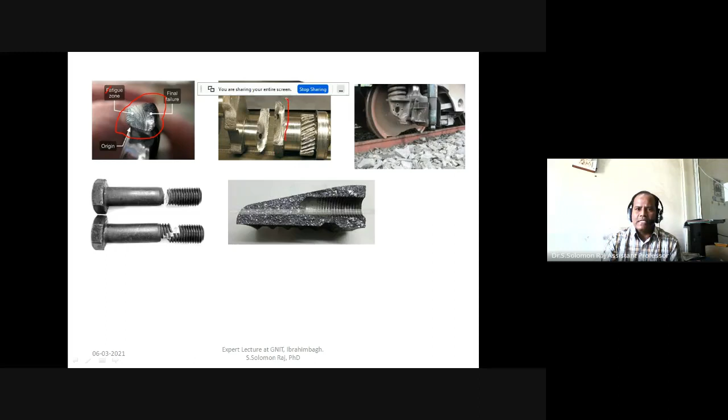Here if you see the gear tooth, once it is connected to some component, it has broken. And this is a railway wagon wheel—imagine, see, this is how it is broken. And this is the very famous component which we all know, it is a bolt. So this bolt has broken at these positions, and this is one such component.

Now tomorrow we all need to answer these questions and give solutions to them, and we need to come up with designs that do not cause failure. So the first statement you all should keep in mind is, as a design engineer, I should see that the component will not fail.

So we have said I don't want the component to fail because I want to arrest failure. Now comes the next question: what actually do I mean by a failure? That is very, very, very important.

Having said that, failure has got its own definitions. With regard to the shirts we wear, we wear a shirt for a few days, after that we try to throw it off. We know what is the failure with regard to the shirt: once it gets faded, or once the collar gets torn off, or once the button starts moving off, or once a tear comes, we do regard that to be a failure.

But when it comes to mechanical components, what do we mean by failure and how do we justify it? With regard to that, failure is basically associated with three factors in mechanical engineering. The first factor could be because of fracture—this is fracture that may lead to failure.

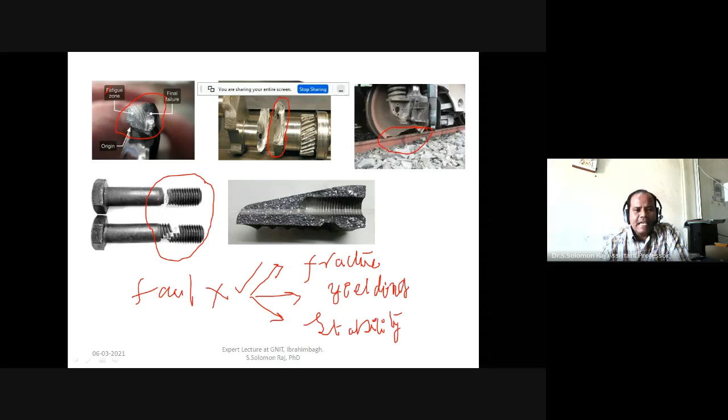For example, if you see here, the bolt we have seen has become two pieces. This means a clean fracture has happened—here the fracture has happened, here the fracture surface has come, here also the fracture has happened, and here also the fracture.

So what is a fracture? Fracture itself is a very big term, but to make you understand, fracture is nothing but creating two new surfaces. When a component breaks into two pieces—you can take a pen and break it, or tear a paper, or break a biscuit into two pieces—you are going to generate new surfaces there. So fracture is associated with the breaking of a component into two or more pieces, wherein two new surfaces are going to form.

In future you will study subjects such as fracture mechanics, linear fracture mechanics and non-linear fracture mechanics—it's altogether a very big science. So fracture is associated with the breaking of a component into two or three pieces.

That is one. Secondly, let us talk about yielding failure. Why do we call it a yielding failure? Just a small example only for my dear second year budding engineers, to give you a glimpse—say for example, there is a roof in our houses.

We have a roof and there is a fan rod. We all use fans at home, and the fan rotates continuously with its blades whenever we switch it on. People here would be sleeping comfortably or walking around, and they get the air distributed so that, because of evaporative cooling, we feel cool. That is the working principle of the fan.

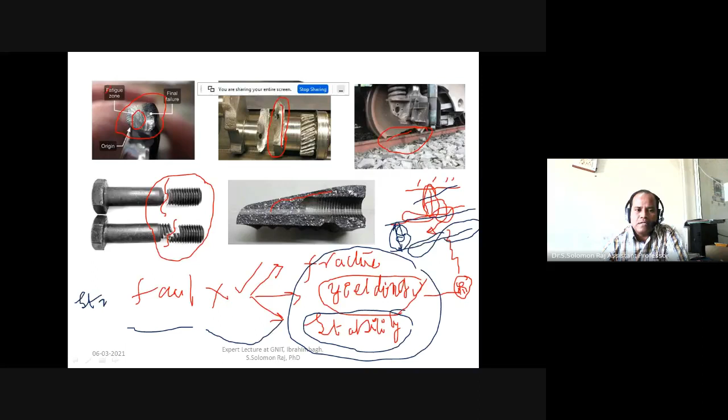All these failure modes—fracture, yielding, and instability—can be attributed to one powerful quantity in engineering, and that is what we call stress.

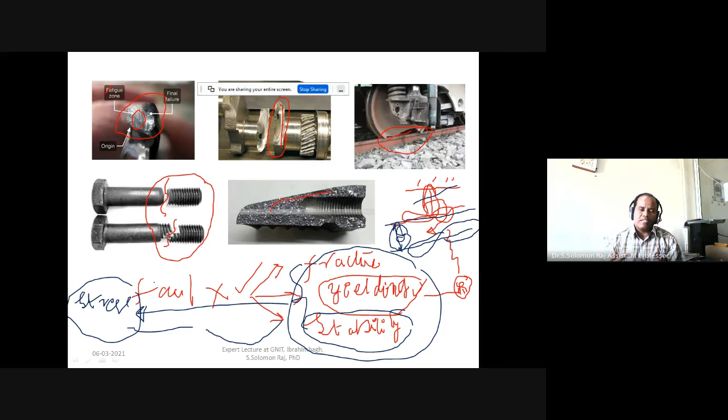Now I will try to throw some light on stress, because I'm specifically asked to answer questions on principal stresses and theories of failure, so I want to take you all in that direction. At any point, if you have anything to ask, please unmute yourself and keep asking. These three modes of failure are all attributed to stress.

Now comes the question: what is stress? For example, take this component. Why did it fail only here? Why did it not fail here, or here, or here—why only at this particular location has it failed?

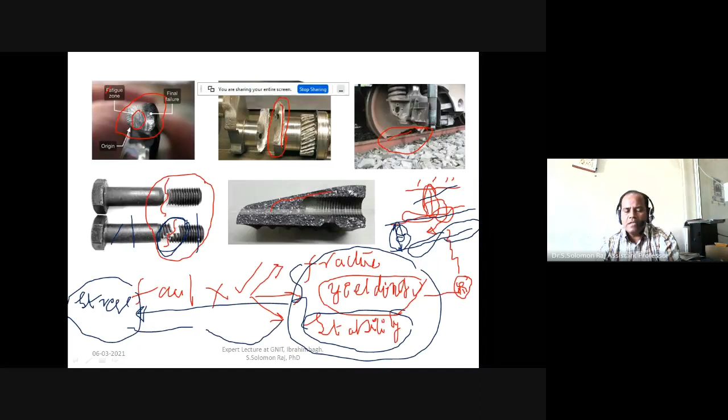Here comes the very important observation made by great scientists much before us. What they presented is—let me throw some light on what you can call stress.

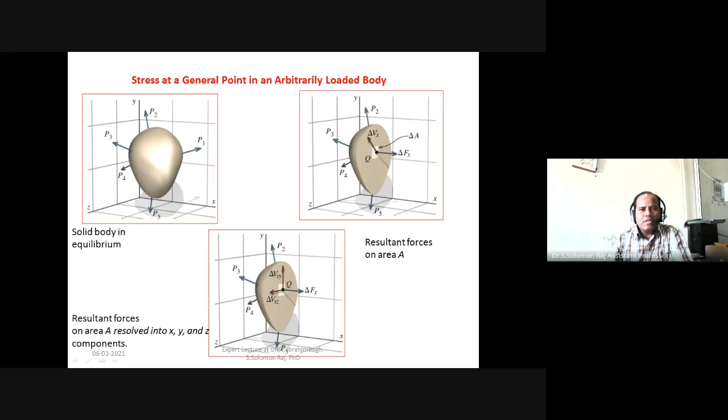Any component you or I design tomorrow—an aeroplane, ship, or household appliances, even a stove, motorcycle, shoes, or watch—is meant to carry some load. So it's very important for an engineer to understand what is actually happening at a point in a material. I want to connect this idea of stress to failure, then to principal stresses, then to theories of failure. Let us move step by step.

So let's say you have taken some material—it can be any random material. Plastic is a material, chalk piece is a material, wood is a material, iron is a material, aluminum is a material. We have a variety of materials.

Once you have a material, take some volume and make a component—a mobile, a bench, or a chair—where we are going to apply loads. If you observe any component, mostly we apply loads only on the surface of that particular component, and any loads we apply act only on the surface.

They act only on the surface. So upon the surface, I may apply point loads, sometimes distributed loads, sometimes varying loads—a variety of loads onto the surface.

Very good. We have applied the loads—what next? The target is, whatever loads I apply, I want this body or material to resist it. If it doesn't resist, it will just move as a rigid body, or flow very freely like a perfect plastic material, which would hamper the very purpose for which we designed it. So whenever we apply loads, this is a very important point: the material or component has infinite number of points.

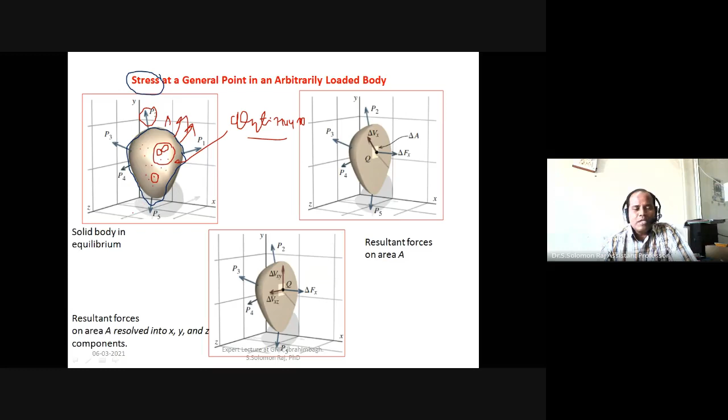Now another doubt might come to you: what is this area you're talking about? When I talk of an area, we should choose some area in the material to define the stress. So, taking this lump sum material, let us say I have cut it by taking some plane.

Imagine we have cut it. After cutting, it is going to look like this. This is the cut surface, the section surface. On this section surface, let us say it's a parallel surface.

Now I want to go to only one point, dear friends. This point is point Q. Having gone to one point in the material, what is happening at this particular point, how much stress is coming at that point, is the ultimate goal every design engineer is worried about, whether with ANSYS packages, fluid packages, or any mechanics. It basically begins with this.

So we need to go to this particular point, and because a point is dimensionless, there cannot be any area for a point. So what people started doing is surrounding this point, taking an infinitesimally small area, which I denote as delta A, a very, very small area.

Having taken this delta A as a plane, upon this plane there can act only two stresses: one stress perpendicular to the plane, and another stress parallel to the plane.

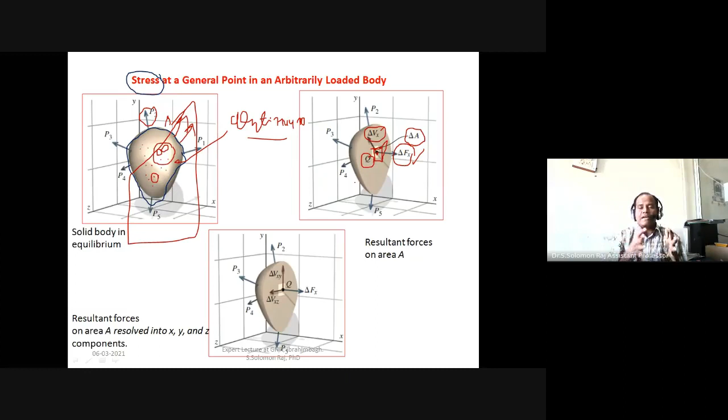So now, over this small infinitesimal area, I know the force acting perpendicular to it, and I know the force acting parallel to the plane. Having known them, people have defined stress as the resistive force offered by the material per unit cross-sectional area.

Now look into this third figure. This is the fundamental. If you understand these fundamentals, I am very sure the remaining big problems are very simple; anybody can solve them.

Let us come back to point Q, dear friends. This white area is the area I have taken, and over that small infinitesimal area, delta Fx is the load acting. This parallel shear force has infinite directions, but normal to the surface there is only one direction, because for a given plane the normal is fixed, while within the plane I can have infinite directions.

So in order to get rid of this, people thought of splitting this in-plane shear force into two components. Taking this as the x-axis and this as the y-axis, we split delta Vx into two components: delta Vxy acting along the y-axis, and delta Vxz acting along the z-axis. We split it because there are infinite directions for the shear force, and in order to be concise and get a unique solution, I need to split it into two directions.

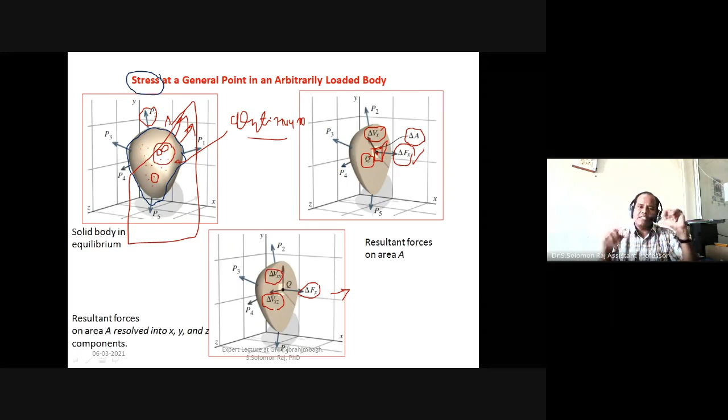So finally, you should have understood that at a given point on a given plane, there are going to be three force components: one along x, delta Fx; one along y, delta Vxy; and one along z, delta Vxz. Now I know the forces, and I know the area of this small infinitesimal portion I have taken.

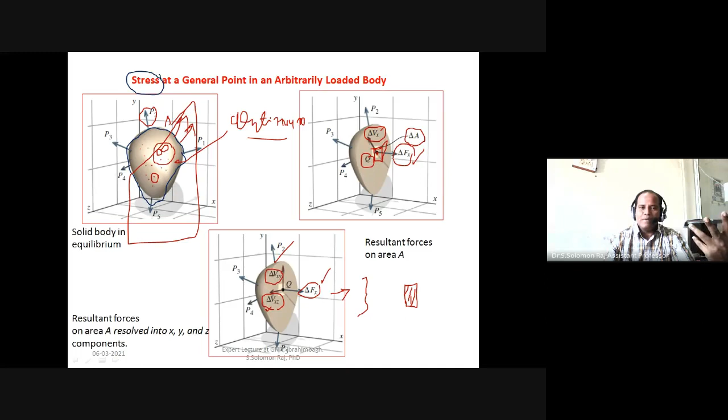I do call it as delta A. By definition, stress along x is normal stress, denoted with sigma. Normal stress along x is equal to the limit as delta A tends to 0. This term is very important: limit delta A tends to 0 means the area is getting converged to a point. So delta Fx, the force acting along x, divided by delta A will give us the normal stress acting along the x direction.

And what about the two other components? Those two are shear, because in-plane loads are called shear loads, and the corresponding stresses are shear stresses, denoted tau xy. Generally in any book they denote it with tau.

Tau xy means, dear people, we need to pay attention to the subscripts here. We have two subscripts, one is y and one is x. The y indicates the direction of the stress, very important. The second subscript index indicates the direction of the stress, and the first index indicates the normal to the plane. So tau xy means it is the shear stress acting in the y direction on a plane whose outward normal is in the x direction.

If you read a very good foreign author's book, they are very specific about the notation. But at your level, second year or third year, without knowing all that, we can still solve so many problems and keep getting very good marks, and that runs our life, so it's no issue for us.

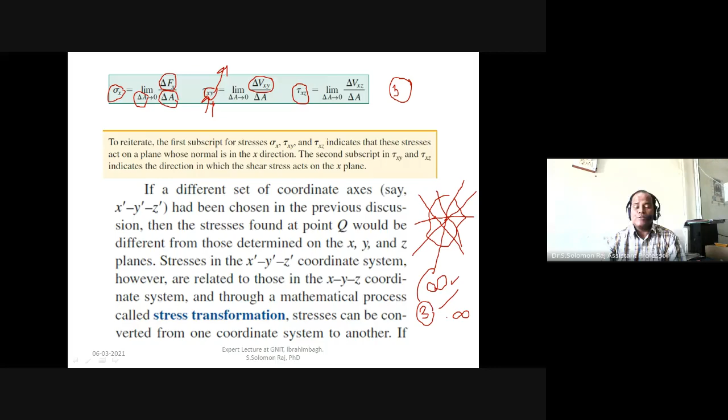Here actually what happened, the great people have come to our rescue.

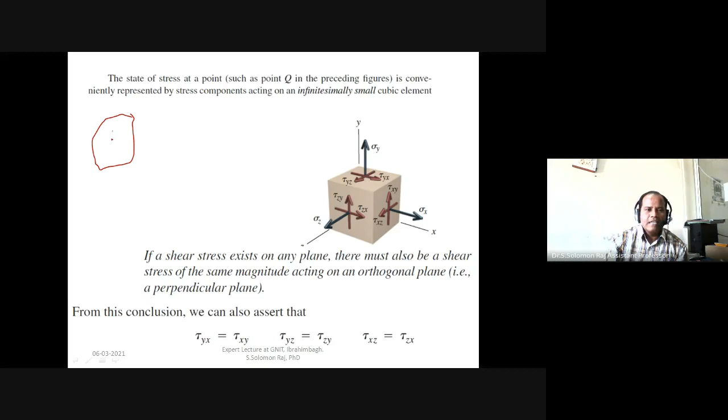These are mutually perpendicular to each other. So at this particular point, I need to draw three orthogonal planes. This investigation was brought in by Cauchy, a great gentleman who did a lot of research work regarding continuum mechanics, and came up with many equations we use when dealing with continuum mechanics. Through Cauchy, we learned there is no need to worry about infinite planes, but only about three mutually perpendicular planes.

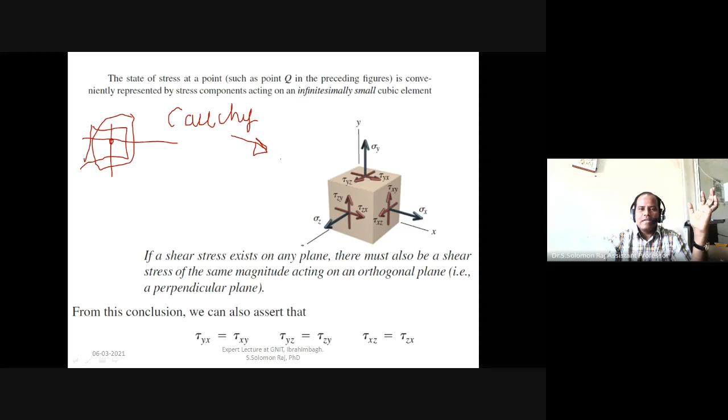In that aspect, there has come a great innovation, what we call a stress element. People have evolved a concept called the stress element. So what is a stress element at a point? At a point in a material, a stress element is nothing but an infinitesimal cube. At a point, we can all draw the cube - it is an infinitesimal small cube. Infinitesimal means everything tends to 0.

So in this cube, you know it is defined by 6 planes, but 3 of the planes are, let us say this is 1, this is 2, and this is 3, dear friends, and these 3 planes are orthogonal to each other. So if I want to know the state of stress at a point, I need to worry only about these 3 mutually perpendicular planes.

As we have seen before, each plane is specified by 3 stress components. So 3 plus 3 plus 3. Finally, state of stress at a point is defined by 9 stress components. Very important conclusion. But if I write them, you all can understand, anyway they are shown here.

One is normal stress along x, sigma x. Normal stress along y, sigma y. Normal stress along z axis, sigma z. So 3 normal stresses and 6 shear stresses, because each plane is characterized by 2 shear components.

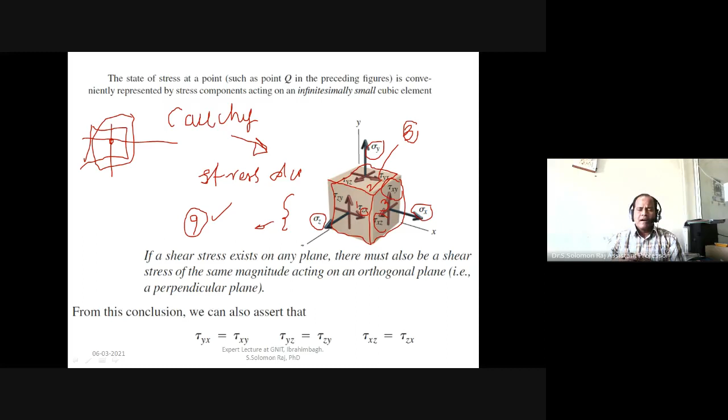Very important. So now, out of these 9 components, using Cauchy's theory and moment equilibrium, because everything finally has to be in equilibrium, out of all these 9 stress components, things have to be in equilibrium. The derivation takes a lot of time, so I'm not getting into that.

We can easily prove that out of these 6 shear components, only 3 shear components are independent, because shear stresses are complementary in nature. This you can learn by heart, since you are just beginners, second year students. So remember that shear stresses at a point in a material are complementary in nature.

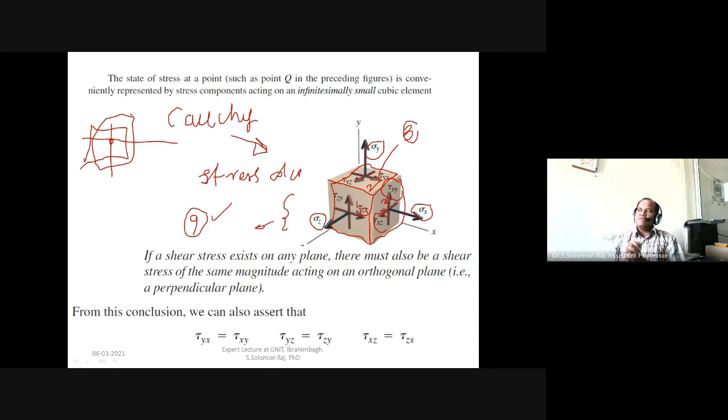So what does that mean? That means tau yx is equal to tau xy. So indices get exchanged: x place takes y, and y place takes x. Then these two are going to be equal.

That means if you take planes 1 or 2, and if you apply shear stress here, by default another will come free of cost. This is what is complementary. Complementary means without cost, like a complementary book or gift. People have proved through theories that shear stresses are complementary in nature. Because of this, out of 6 shear components, only 3 shear components are independent.

Finally, at a point in a material, the material can be homogeneous, non-homogeneous, anisotropic or isotropic, monoclinic, orthotropic - nothing to worry. But every point in a material can have 3 plus 3, that is 6 independent stress components. Though we have 9 components, because of the complementary nature of shear stresses, we only have 6 stress components at a point in the material. Very well said, dear friends.

Having said that, now let us move and try to connect ourselves to the failure of the components. As I told you, failure can be realized in terms of fracture, in terms of yielding, and in terms of stability. So these 3 terms are connected to the stresses.

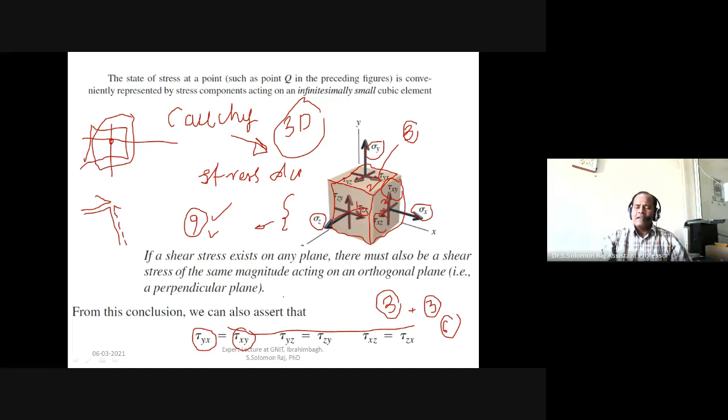Now, in a 3-dimensional scenario, because we were discussing just before, X, Y, Z axis - whenever you work in X, Y, Z axis, dear friends, you know it is nothing but a 3-dimensional space. So in a 3-dimensional space, we have 6 stress components. But working problems in 3D is very laborious and very complex under few circumstances.

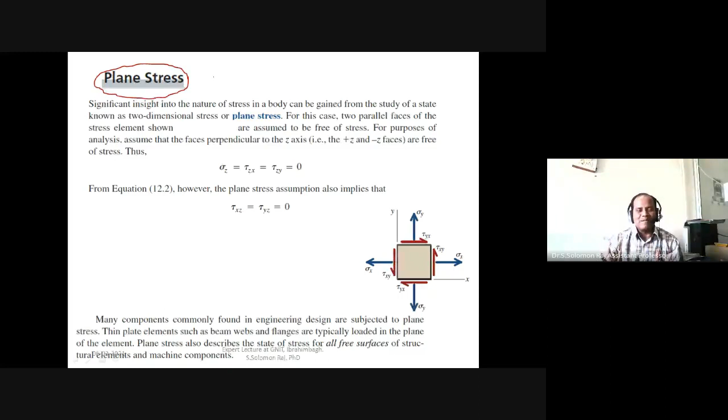So all the stresses, if I assume in the third direction are 0, that type of condition is what we call a plane stress condition.

Another powerful problem is plane strain. But mostly we do not discuss it in second, third and fourth year subjects, because plane stress is a bit easy when compared to plane strain.

So plane stress is one state of stress. For example, take a shaft. You have all studied torsion, say torsion of a shaft. It's a shaft, you have subjected it to twisting moment. Then at every point you take upon the surface, we are very sure only 2D stresses are going to act. The stress in the third direction we can make equal to 0, and therefore this problem can be modeled as a 2-dimensional problem. Even a cantilever beam, and many problems like this, we can study them in the 2-dimensional domain.

So in plane stress condition, all the stress components in the third direction will go to 0: Sigma Z, tau Zx, tau Zy, these will go to 0. This condition is called the plane stress condition.

So if I draw the plane stress condition with the same infinitesimal cube, and make these stress components 0, since 3 have gone to 0, I am left with only 3. What are they? One is sigma x, the sigma y, and the third component is tau xy.

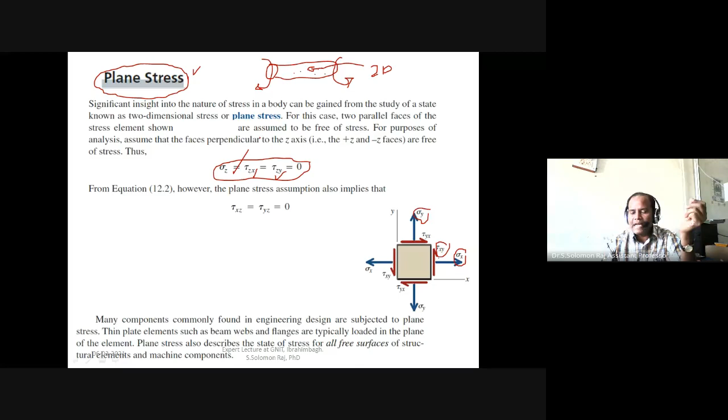And these two magnitudes are always the same because of complementary nature. If it is towards right, then it should be opposite; if it is like this, then it should be like this. Complementary means that they should come towards each other, or move away from each other, at a point in a material. So we are left with only 3 stress components.

So generally, instead of drawing the cube, people try to show it as a plane, but it doesn't mean it's a plane. It actually has some Z direction that is perpendicular to the presentation I am making.

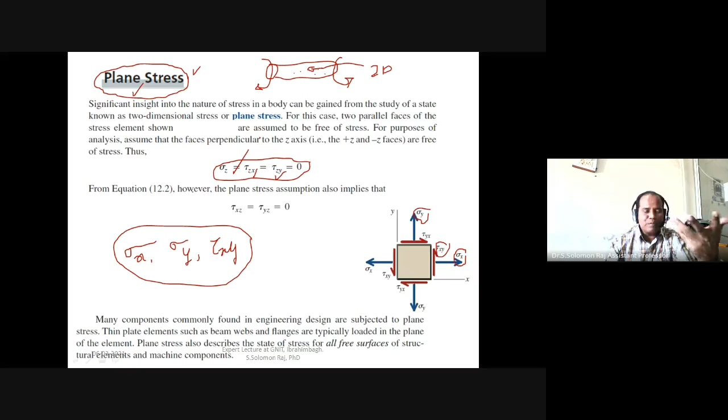So finally, before I take you to the principal stresses, I want to tell you that with regard to plane stresses, at any point in the material I am going to have 3 stress components: sigma x, sigma y, and one shear stress. So 2 normal stresses and 1 shear stress are the only components I am going to have with regard to problems in plane stress. And all other components we assume equal to 0.

Now comes a very important discussion. For example, see this problem. It's a real-time problem where you have a pole fixed to the base with the help of bolts and nut mechanism, as you all know as mechanical students. Now let us say it is subjected to forces, this is x-axis, this is y-axis, and this is z-axis. Let us investigate what can happen to this problem.

Along the y-axis, there is a 17 kilonewton force acting in the negative y direction. When the load passes through the axis, we call it an axial load. With regard to axial load, having made the Saint Venant's simplification, you know how to calculate the stress: sigma is equal to P by A, and delta is equal to PL by AE. I hope you have remembered these formulae, since exams are coming near. You can even calculate the strain, because stress by strain is equal to Young's modulus.

Apart from this axial load, this pole is also subjected to a twisting moment of 3.75 kilonewton meters, and equally subjected to a pulling force of 3.2 kilonewtons at this particular point in the z direction.

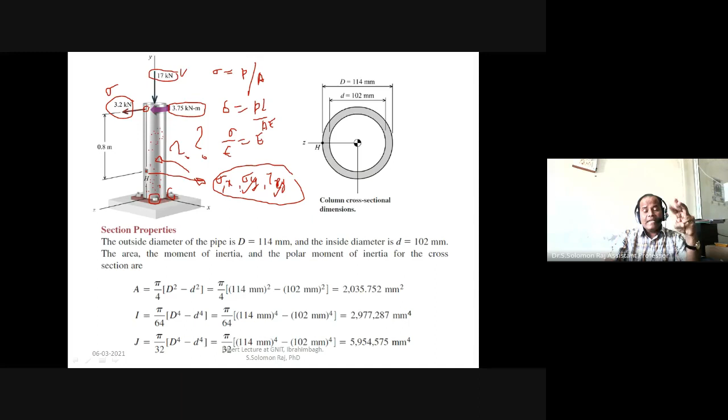Next comes the important question. Every point has these three components, but at which point crack may initiate, or at which point yielding may start? It's a very big challenge for a design engineer.

So in that aspect, people have come up with a new strategy. What they have come to know is that fracture, that means breaking a component into two pieces, can be done only by either the maximum normal stress or the maximum shear stress. Please keep it in mind. Fracture - I have shown you enough samples to understand fracture.

So this fracture can take place either because of the maximum normal stress or the maximum shear stress.

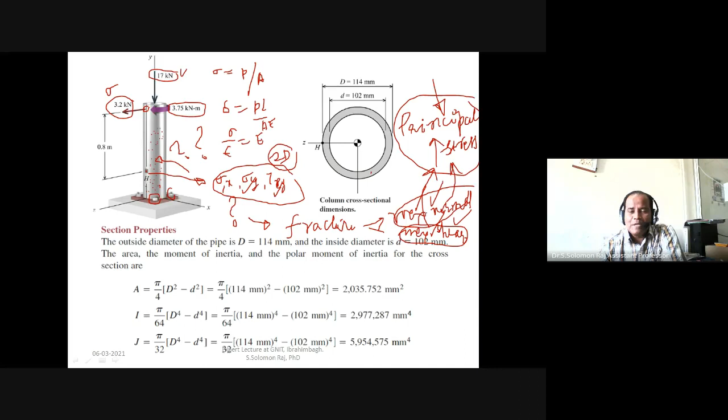Next comes the very important question. Now let us focus, how do I calculate these principal stresses at a point in a material, because I know they have to be maximum. Please keep it in mind, they have to be maximum. So simply I adopt some maximization technique and try to come up with the principal stresses. So I skip this problem because this you can easily understand.

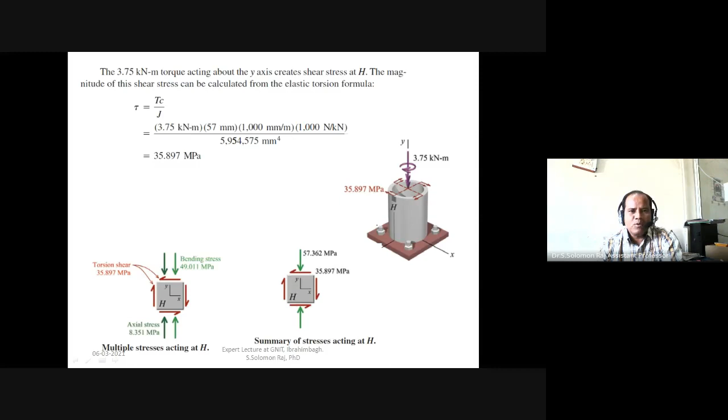Now I come back here, dear friends. I have taken a stress element, and this is in 2D. I have only three components, sigma x, sigma y, and the third component is tau yx or tau xy. Because these two are same, I cannot treat them as independent. So one of them only I take it as independent. So I have only these three stress components.

So all these directions, to begin the show, we treat them as positive, and we will move ahead having attached a coordinate system x, y, and z. And in this one, z is coming out of the presentation, coming out of the laptop screen. That is the direction of z, because we need to follow right-handed coordinate system.

So now I have chosen how many planes? I have chosen this as one plane and this as one plane. So only 4 planes I have chosen, and on these 4 planes I know what are the stresses acting on this plane, dear friends. One is sigma x and tau xy. On this plane, sigma y and tau xy. On this plane, sigma x and tau xy. So like this, I know what are the stress components acting only on the 4 planes.

Now comes, because for the failure to occur, I need to really focus on maximum normal and maximum shear. But I really do not know upon which planes this maximum normal is going to act and the maximum shear is going to act. Please understand the crux here. These are the four planes and these are the stress components. And this may not be the maximum normal stress, and this may not be the maximum shear stress.

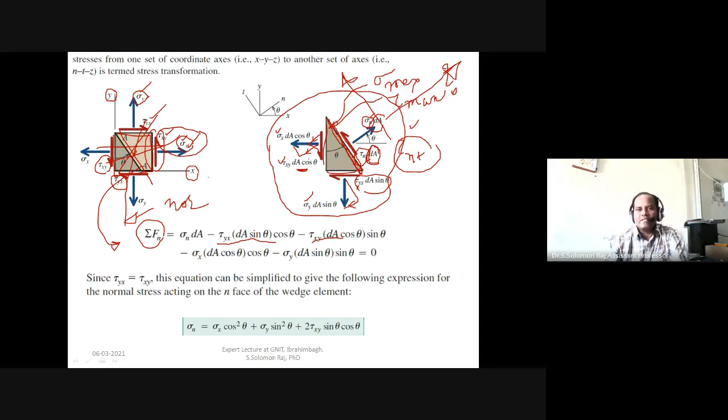And sigma x, if you take it, it acts like this. Split this into two components, like this and like this. It is also opposite to my normal direction, so it is also becoming minus.

And even sigma y, you break it here, see, it's going to be negative. So you balance all the forces in the normal direction. This is a simple equation we all can get, and you can write all these equations comfortably with a pen.

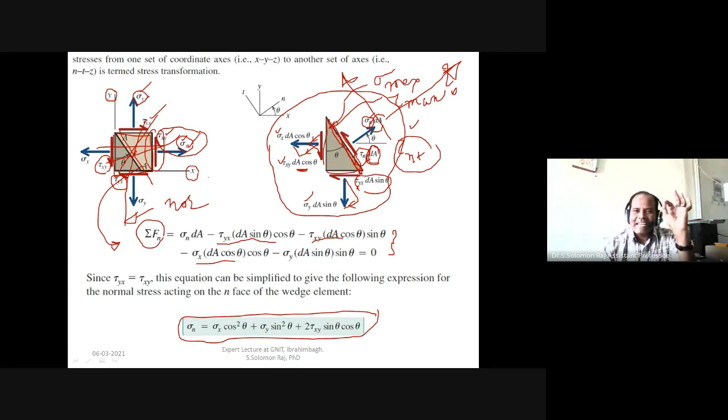We know that tau xy is equal to tau yx because of the complementary nature, and simply solving it, I get a very important equation. This is the normal stress on a plane which is inclined at theta degrees to the original x-axis, if I take this one as the original x-axis.

Now, what is my objective? My objective is to go to a plane upon which this normal stress is maximum. If you look into the equation, sigma x, sigma y, tau xy and 2 are constants, only theta is the variable here, that is the parameter.

So I want to maximize this sigma n. You know, from mathematics, to maximize a function, we take the first derivative and equate it to 0. And to check whether it is really maxima or minima, we take the second derivative, and based upon the sign, we decide it.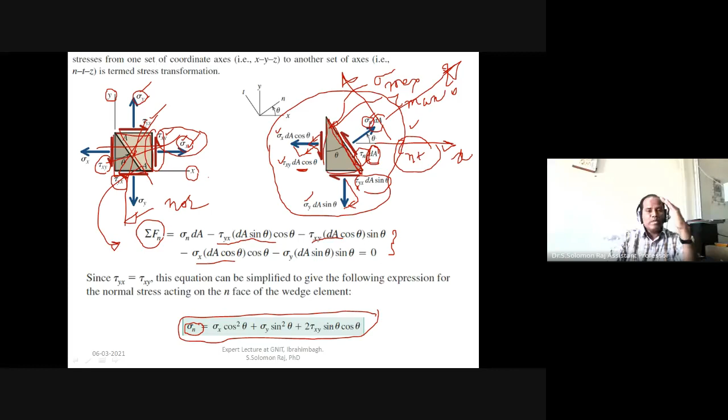So now we try to take the derivative of this, d sigma n by d theta, equate it to 0. We are going to get a relationship for theta corresponding to a plane upon which this normal stress is going to be maximum. Yeah, so that is what precisely we have done.

Next, similarly, if I balance all the forces in this other direction, same 6 components you are going to have, but the other part of the force vector you are going to get. So accordingly, if you balance all the forces in this direction, we are going to get the second expression.

From this, if I write the expression for shear stress tangential to the normal, we get the expression for shear stress on a plane whose inclination is theta with the original x. So now I have the expression for normal stress and the expression for shear stress. Our objective, according to the failure criteria, is to maximize them.

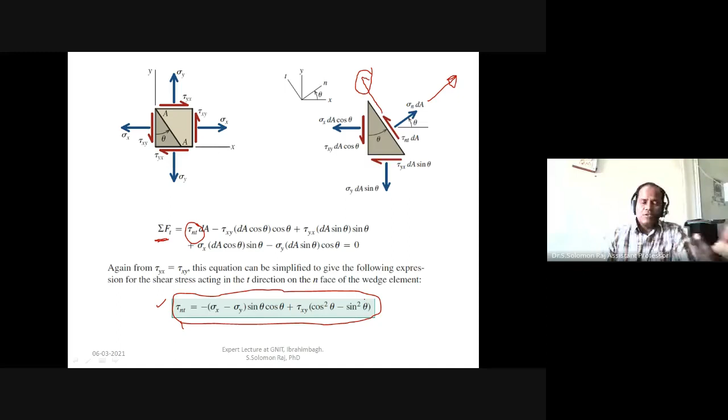To maximize them, the next step is differentiation. To make the differentiation simpler, people have introduced trigonometric identities: cos square theta equals half of 1 plus cos 2theta, sin square theta equals half of 1 minus cos 2theta, and sin 2theta equals 2 sin theta cos theta. Plugging these identities into the expressions and simplifying gives us the normal stress expression and the shear stress expression.

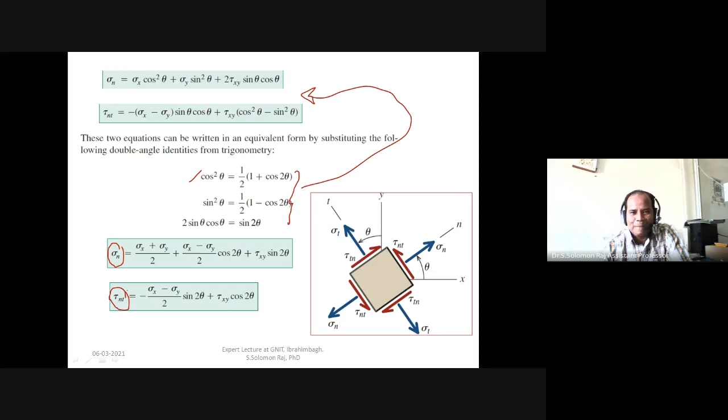Having got these expressions, we now take the derivatives to find the maximum normal stress and maximum shear stress.

If I want to find the plane upon which the normal stress is maximum, I need to differentiate sigma with respect to theta and equate it to 0. Simplifying this, since we have sine and cosine terms, we can write tan 2theta equal to tau xy by sigma x minus sigma y by 2.

Tan 2theta p is equal to 2 tau xy by sigma x minus sigma y, and this corresponds to the maximum normal stress. We attach the subscript p to theta to indicate it is a principal plane. So tan 2theta p equals this expression. Knowing sigma x, sigma y, and tau xy, if you substitute, you will get the value of theta p.

Taking theta p with respect to the original x axis and drawing the plane at that angle, the normal stress will be maximum on that plane. That is the final underlying fact.

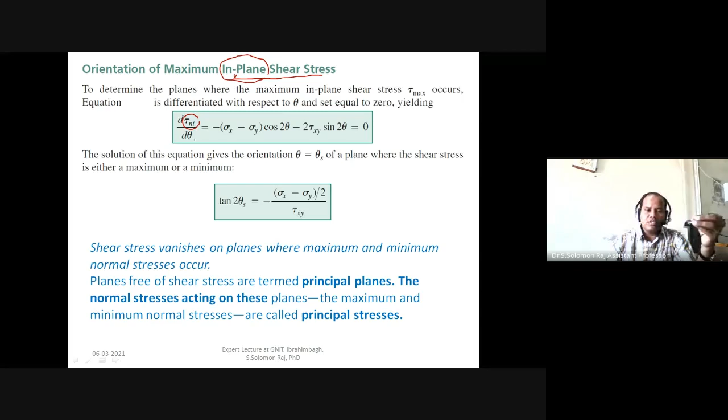We take the shear stress on the normal plane in the tangential direction, differentiate it with respect to theta, and equate it to 0. This gives an expression for theta s, which corresponds to the angle a plane makes with respect to x upon which shear stress is maximum: tan 2theta s equals minus sigma x minus sigma y by 2, divided by tau xy.

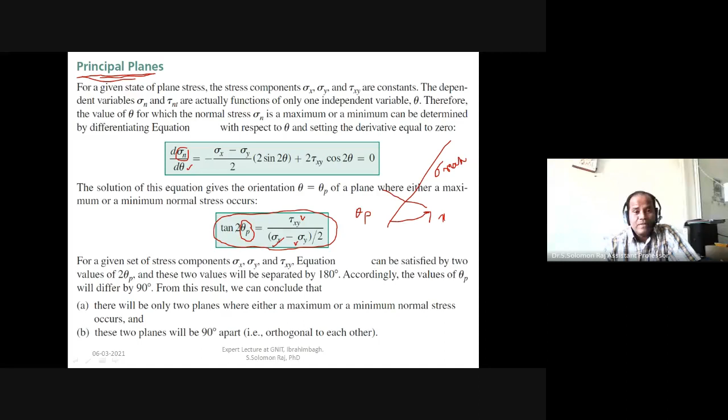If you observe tan 2theta p and tan 2theta s, they are one and the same expression, but one is the reciprocal of the other, not the inverse. So tan 2theta p is reciprocal to tan 2theta s. If you work out the mathematics, multiplying tan 2theta s by the reciprocal tan 2theta p, the product equals minus 1.

Very easily we can prove that the algebraic sum of theta s plus theta p turns out to be plus or minus 45 degrees. This is a strong outcome derived from the reciprocal nature of the two functions in this trigonometric approach. This means the plane of maximum shear and the plane of maximum normal stress are separated by plus or minus 45 degrees - plus 45 meaning counterclockwise, minus 45 meaning clockwise direction. This is how we find theta s and theta p.

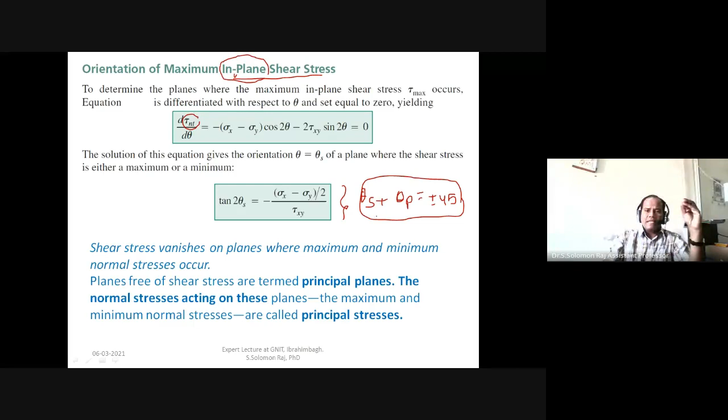Once you get theta s and theta p, back substitute these values into the sigma n expression, and you will get the two normal stresses corresponding to the two thetas.

One of them is going to be the maximum and one of them is going to be the minimum. These two are what we call the principal normal stresses. The theta s you have found out, bring it here and substitute that theta s into this. You will find that this is theta p.

Bring this theta p, substitute here, and we get sigma max and sigma minimum. Bring this theta p and substitute into this shear stress expression. You all will find, please try at home, that this one turns out to be equal to 0.

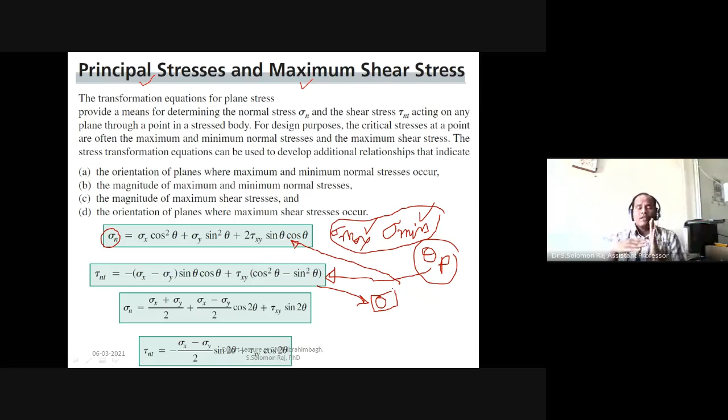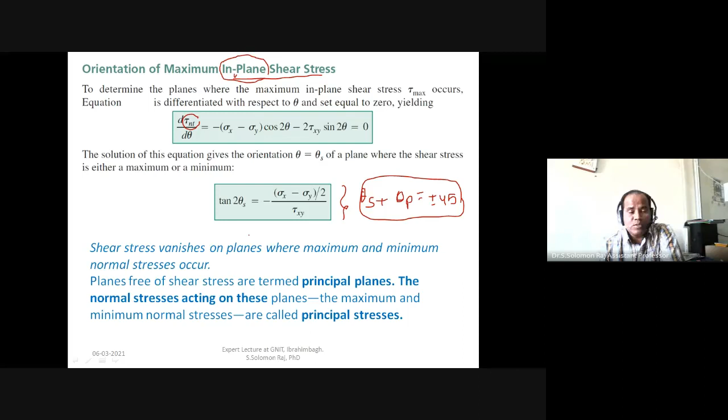So fundamentally what I can say is that the planes upon which maximum or minimum normal stress acts, there is no shear stress. It's a very good question, and you may face it in competitive exams. Having said that, you can substitute this theta s into the shear stress expression and come up with the maximum shear stress.

So now, having said that, two normal stresses we are going to get: principal stress 1 and principal stress 2, the maximum and minimum. This is a simple expression everybody memorizes, including myself way back. So in the problem you will be given sigma x, sigma y and tau xy, and you can quickly calculate sigma p1 and sigma p2.

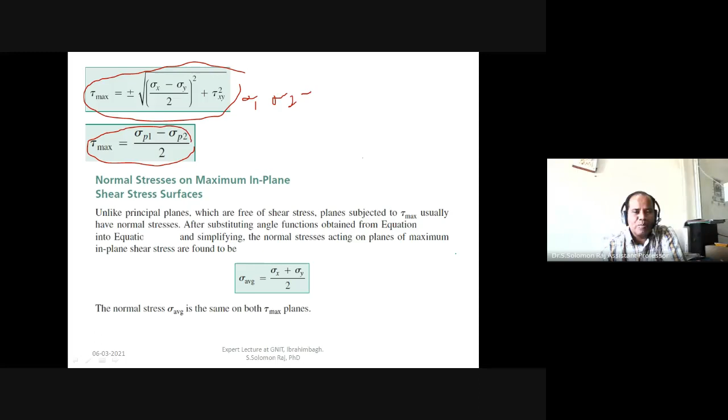And this is the expression we derive for the maximum shear stress. So finding sigma 1, sigma 2, and tau maximum are nothing but what we call stress transformation or the principal stresses.

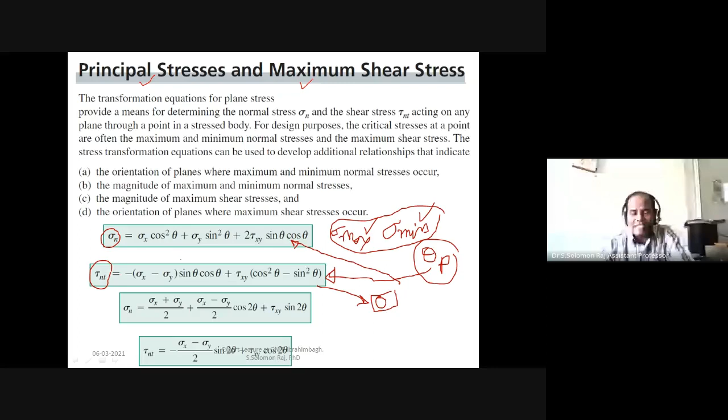And the beauty, finally I want to tell you: into this shear stress expression, if you try to substitute this theta s, plug theta s into this sigma n, you don't find sigma n to be equal to 0, but there is some amount of normal stress. So that indicates the final conclusive takeaway.

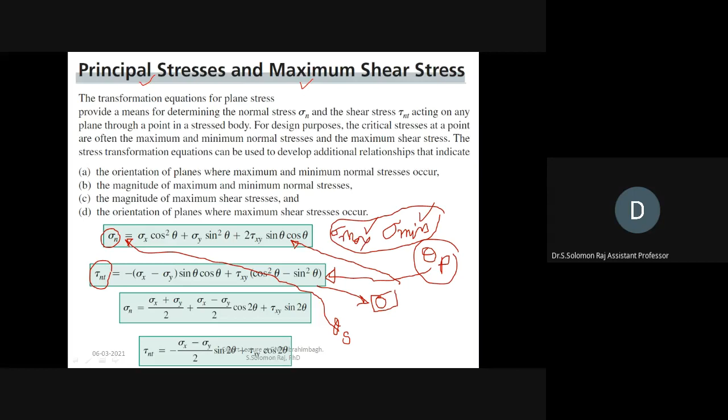Planes upon which maximum or minimum normal stress acts, shear stress is 0. But the planes upon which maximum shear stress acts, there is some amount of normal stress, which we can get by substituting into this expression.

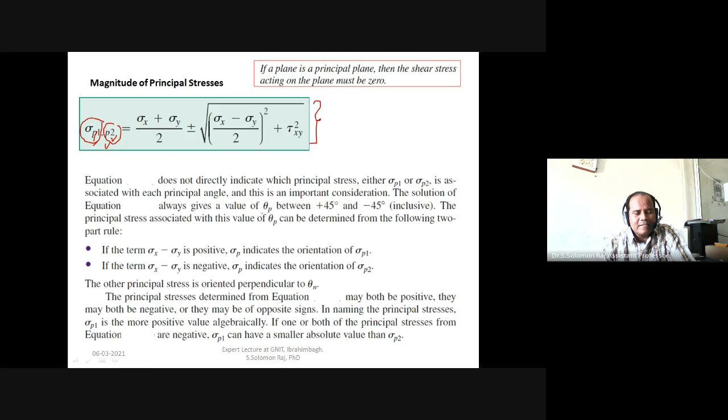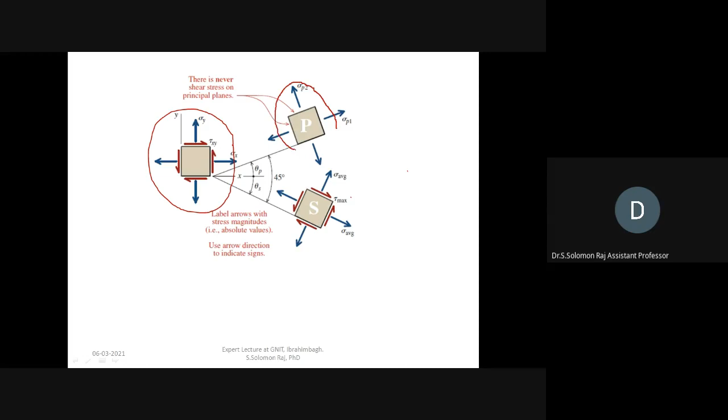So this is the original stress element with which I began, and this is the normal stress or principal stress element, and this is the shear stress element. You all should be in a position, if this is given to you, to draw this stress element and this element.

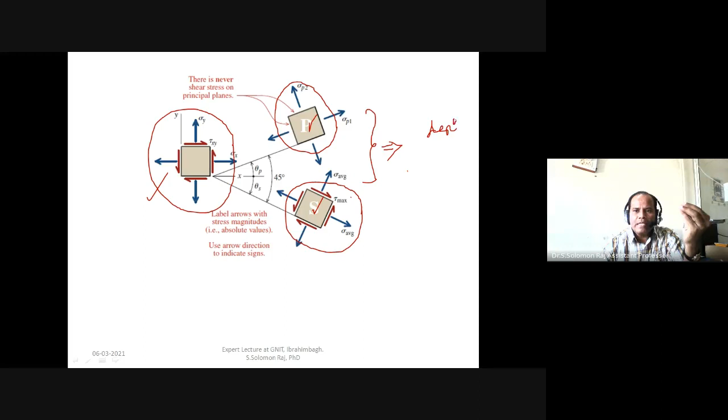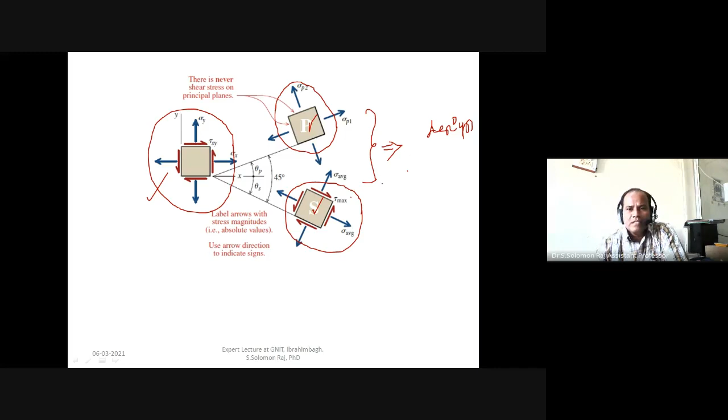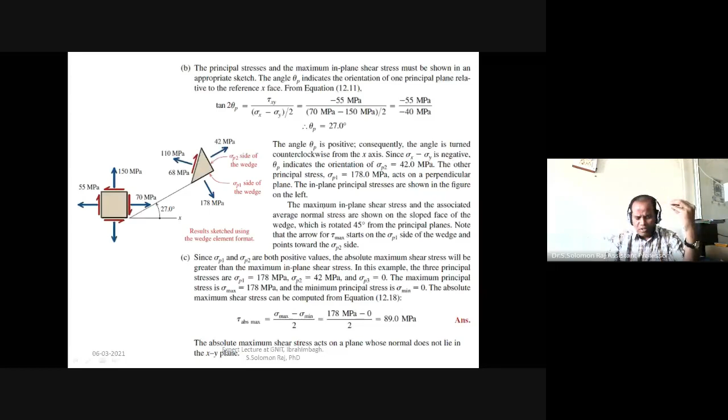Then this will give a passage for us to enter into the original design, wherein I can design the components to avoid failure from fracture, yielding, and instability. So with this, since this is a sample problem, you all can solve more, because there are enough problems in enough books. But try to always read some very good foreign author books where a good number of problems are solved. You can develop a very good concept.

And so now I want to ask, is Raghu sir here? Raghu sir, are you there? Sir, please tell me, how much time do we have left? We still have time, you can carry on, sir. We have 10 to 20 minutes, sir. Okay, in 10 to 20 minutes I will try to close. I will take people quickly to the theories of failure, just explain and leave it there, okay? Okay sir, okay sir, all right, thank you.

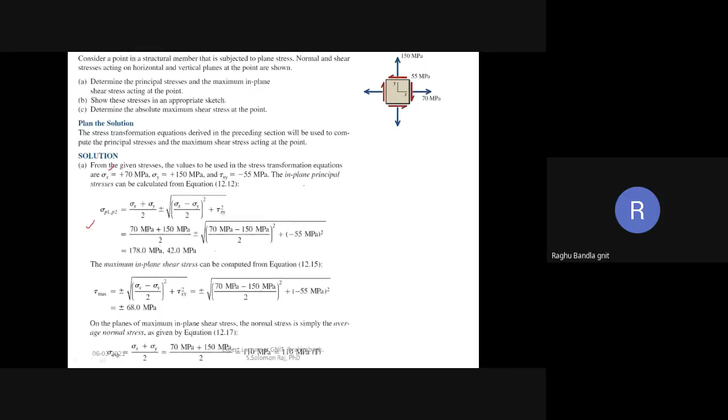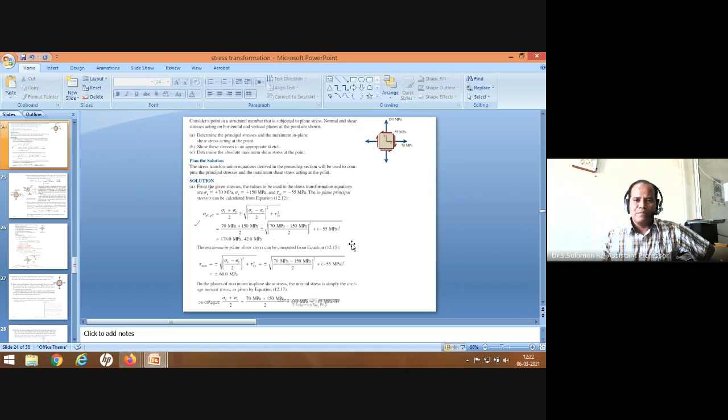So dear students, before I move forward to theories of failure, if you have anything to ask me till now, you are more welcome. Now, having said that, we will go ahead, I'll try to share something new, and let me present what you can call this.

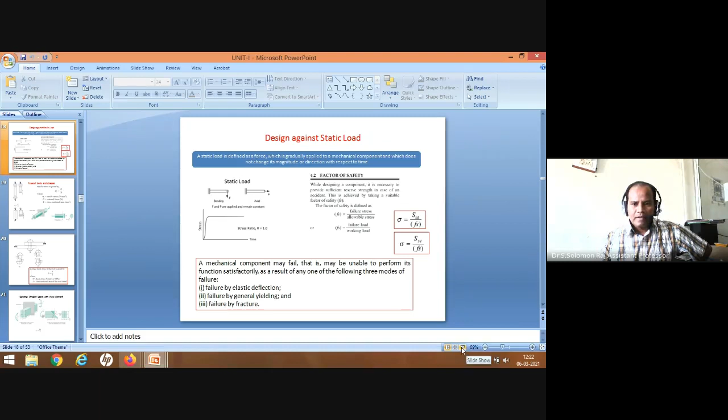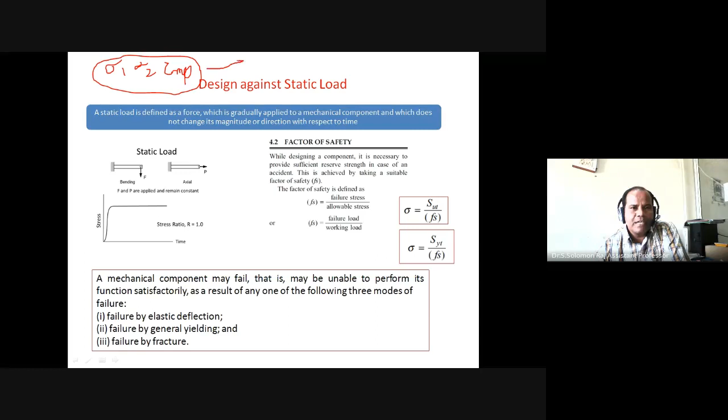So dear students, having said that, till now what we have done is very important calculations with regard to the stresses, and we calculated sigma 1, sigma 2, and tau max. Now how do we use these three to predict the failure of a material is what the theories of failure are all about.

Theories of failure we have with regard to the static load, we have with regard to the fluctuating loads, and we have with regard to the buckling loads also. So every load has got its own theories of failure.

So in theories of failure, basically what we do is use these maximum normal or maximum shear stresses we have got. As I told you, any component, we go to one point, there is a stress acting, and every point has inherent strengths. So the strengths of the component, especially with regard to isotropic materials, we all have done a stress strain curve.

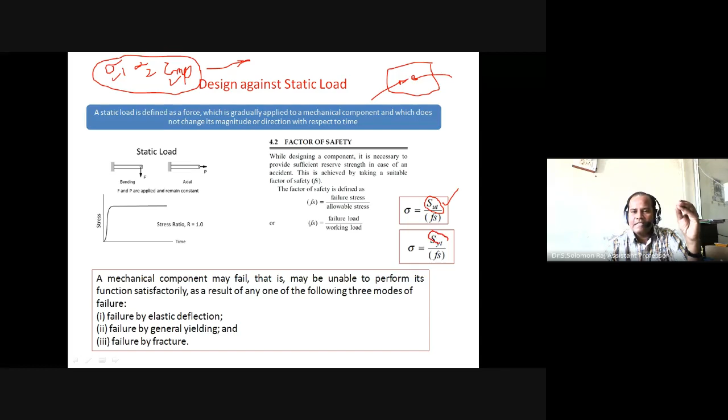Stress is the state, this can be zero, this can be maximum. What is strength? Strength is nothing but the capacity of the material to bear the load. So if load applied is more than this, the component is going to fail. So these two strengths we need to have in order to go with the theories of failure.

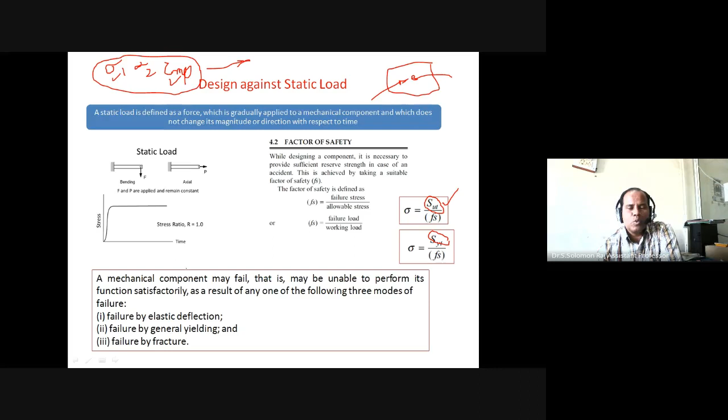So theories of failure are the hypotheses predicted by so many people to predict the failure of a mechanical component. And this I want to skip because these are very small things for you people.

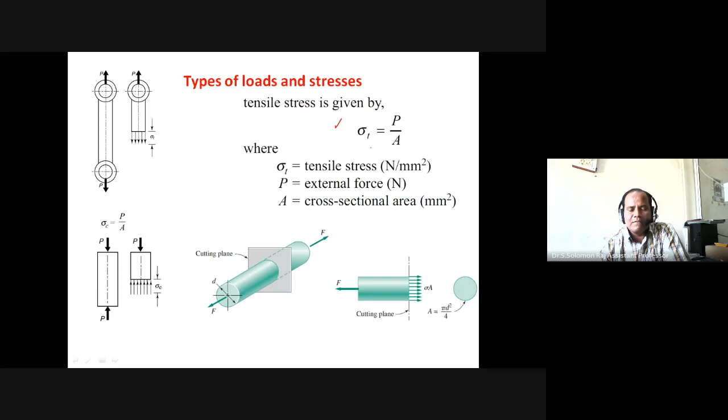If there is an axial load, this is how we calculate the normal stress. And if it is a shear, this is how we calculate the shear stress. With regard to the bending of problems, we use sigma equals M y by I. And lastly, with regards to torsion, I can calculate what is the tau x y.

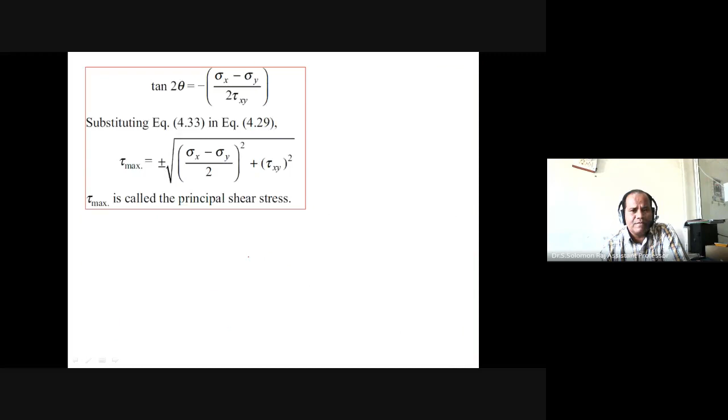So having known them, then coming back to the plane stress, we have enough discussed. So then came the theories of failure. Theories of failure provide a relationship between the strength of the machine component subjected to a complex state of stress with the mechanical properties.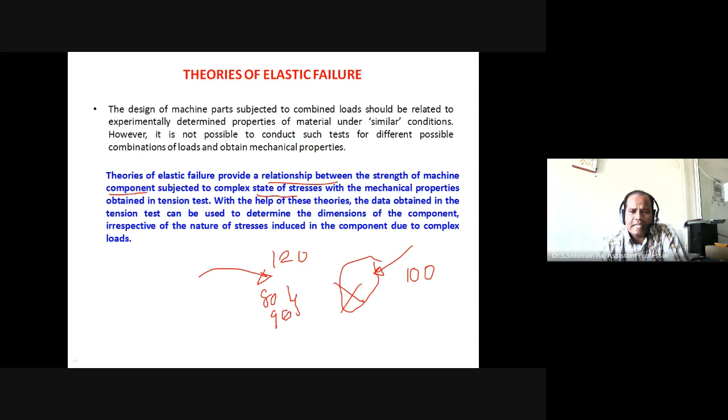So finally, there is a component. Let us say its carrying capacity is only 100 and I am loading it to 120. Common sense tells this component is going to fail. And there is a material whose capacity is 100, and if I load it 80, 90, 95, at least to a great extent, I am very sure this component is not going to fail. So this is a simple philosophy we adopt in the theories of failure.

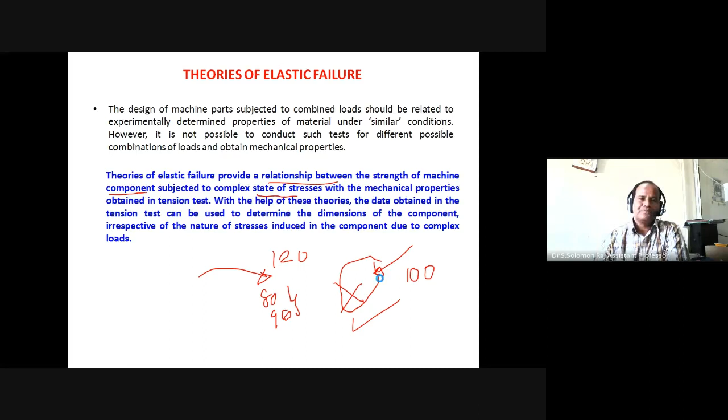So many people have made great efforts in proposing them. And we have generally used 5 theories of failure: maximum principal stress, maximum shear stress, distortion energy, maximum strain, and total strain energy theory.

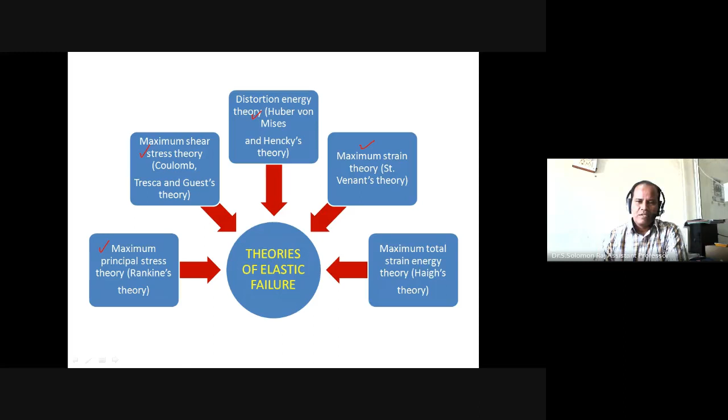So what does the maximum principal stress theory say? It states that the failure of a mechanical component takes place when the maximum principal stress reaches the ultimate strength of the material.

Very, very important point. According to this theory of failure, proposed by Rankine in 1850, failure will initiate when the maximum principal stress becomes equal to ultimate strength. So according to this theory of failure, we will finally write, because a lot is there for me to explain, but let me brush up so that you might have got some idea.

So finally, according to this theory of failure, if you want to decide the failure, we need to calculate the normal stresses. So at any point in a material, we have 3 normal stresses: sigma 1, sigma 2, and sigma 3, and we want them to be maxima or minima. So therefore they are the principal stresses.

And if sigma 1 is equal to SYT by factor of safety, or if it is equal to SUT by factor of safety, this is a limiting value. This is the maximum limit to which this sigma 1 can reach. Anything over and above this will contribute to failure. So this is a simple expression, and it's a straight line equation, and it is a constant.

So therefore, if you draw it in a 2-dimensional space, taking sigma 1 along x-axis and sigma 2 along y-axis, you are going to get a failure envelope, which basically more or less looks like a square if yield strength in tension and compression or ultimate strength in tension and compression are equal.

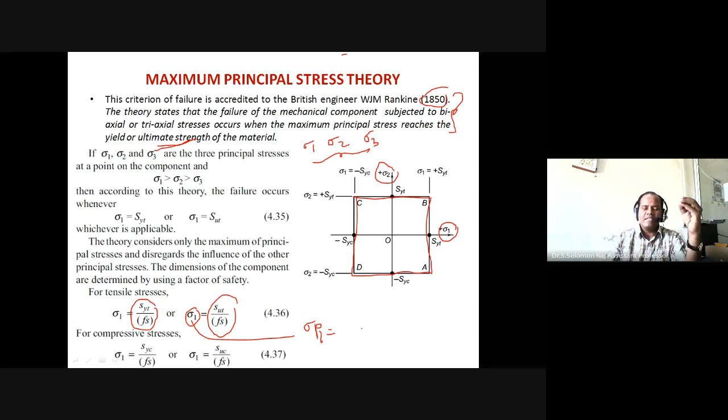Secondly, we have the most widely used second theory of failure, the shear stress theory of failure, due to Coulomb, Tresca, and Guest. These three people combinedly proposed it, and it is the most widely used theory of failure.

I want to quote one example. You have all done a universal tension test on a UTM, and if you observe the specimen, you've studied this, and there's a question in the lab exam too. You get the cup and cone structure for a typical ductile material. Material is very important. If you conduct a UTM test on a typical ductile material and observe the failed surfaces, one component has a cup and the other generates a cone sort of structure. If you draw a line along these failed surfaces, you find it inclined at 45 degrees to the loading axis.

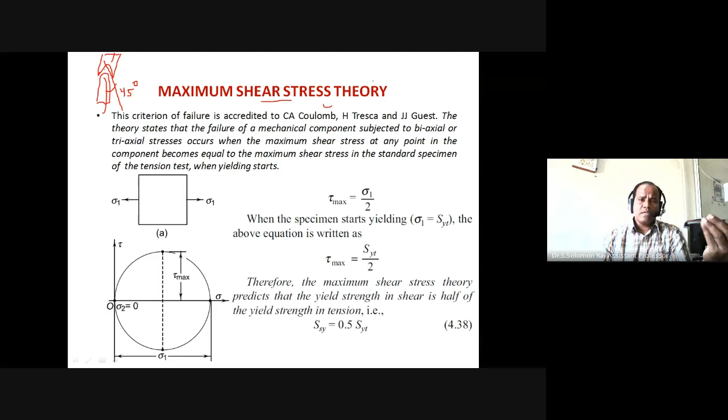Why 45 degrees? Because if you go to stress transformation and substitute theta equal to 45 degrees, you find shear stress to be maximum on a plane inclined at 45 degrees. This led many engineers to conclude that ductile materials always mostly fail in shear. It's a very important point: ductile materials always fail in shear, whereas brittle materials always fail in normal mode. So this theory has got a lot of prominence.

According to this theory of failure, if the maximum shear stress, calculated according to the principal stresses explanation, is equal to SYT by 2, the component is going to fail.

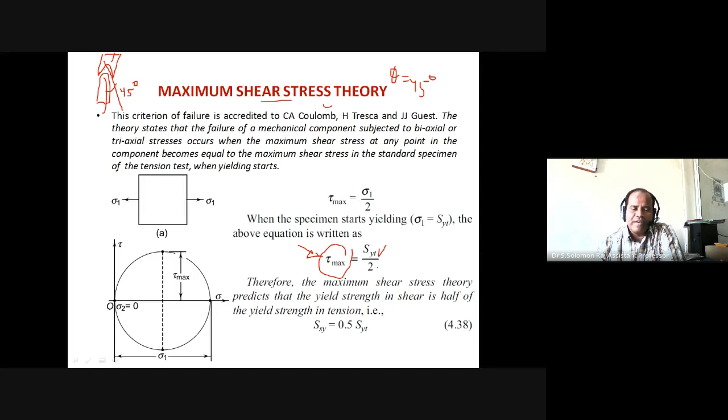Accordingly, we have another theory of failure, the distortion energy theory of failure, the most widely used, above the shear stress theory of failure. It's always there in all packages, and we call it von Mises, who contributed a lot. There's so much to discuss, but we've literally run out of time, so let me not get into that. The important aspect of this theory is that it focuses on distortion energy. So what is distortion and what is non-distortion? Two things we need to understand.

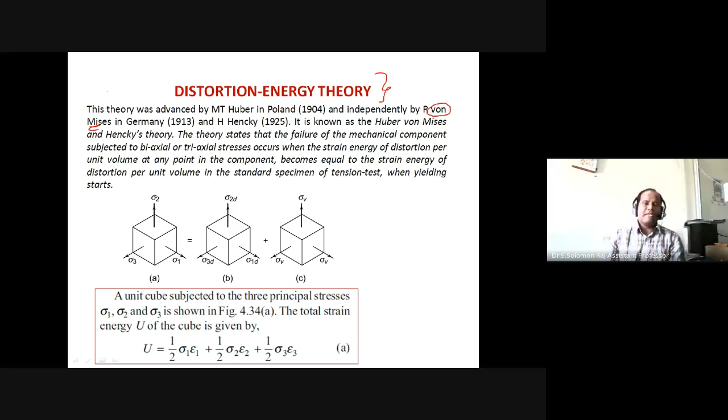If you take a ball and compress it equally from all sides, the ball shape remains the same but the size reduces. That means the ball did not get distorted. The energy corresponding to that is what people call in mechanics of materials as dilatation. But if you take a block and apply load, and the shape changes, then we can say the component has been distorted. These three people combinedly proposed that the failure of a component mostly takes place only because of distortion energy, that is, change in shape.

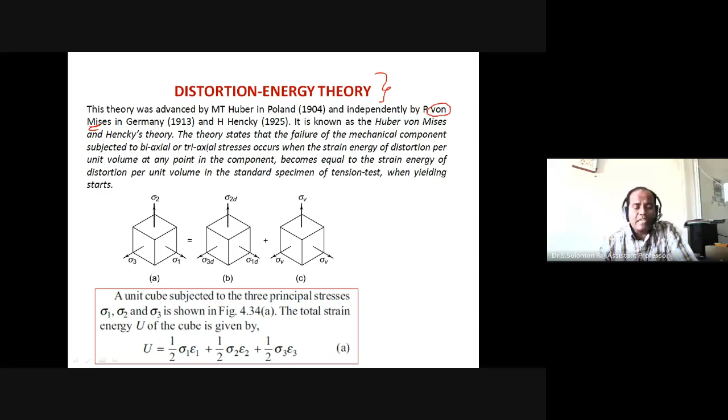Accordingly, we need to calculate these two energies and come up with only the distortion energy, linking it to material properties. According to this theory of failure, in 2D, the governing equation for failure is: yield strength by factor of safety equals the square root of sigma 1 square minus sigma 1 sigma 2 plus sigma 2 square. If this is violated, the component is going to fail.

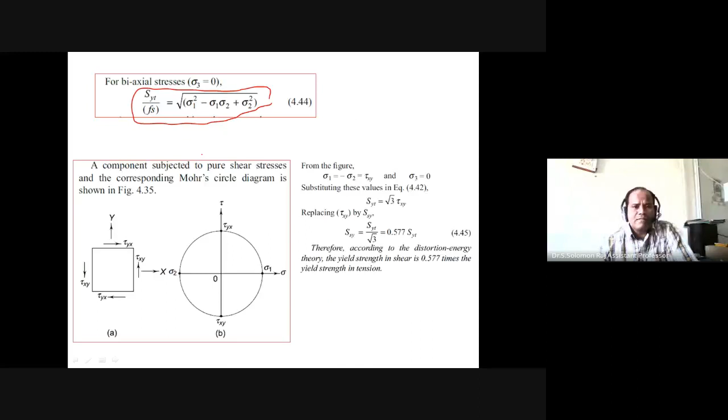Like this, dear friends, we have other theories of failure which are not so important, like the maximum strain theory and Haigh's total strain energy theory of failure.

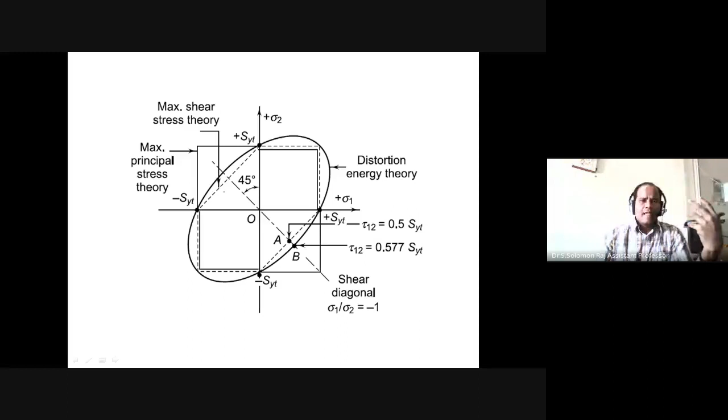With these things, I sincerely feel that I've given some insight into mechanics of materials with regard to principal stresses and theories of failure, which are the most important parts of mechanics of materials and design engineering. So with these few words, thank you so much, dear friends, for listening to me and for having me here. It's goodbye from my side.